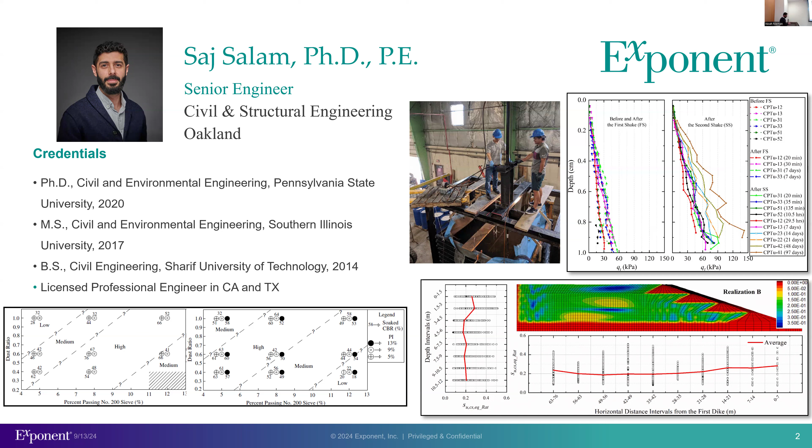The other part of my study was running numerical simulations to study the seismic stability of tailings dams. I modeled the tailings dam with random fields, assigning random properties to the tailings instead of uniform properties, which is far from reality. I'll stop here and move to what we do at Exponent.

We've been involved with a lot of high-profile failures in the States and internationally. Many of you may recognize this picture — this is the bridge collapse in Baltimore that happened a year ago, and we are already working on behalf of one of the involved parties in this project. The top right one is the bridge collapse in Pittsburgh that happened about 3 or 4 years ago. We worked on that case and helped our clients understand the causes and the failure mechanism.

This bottom left one was a project I worked on last year in the Los Angeles area — a huge landslide that resulted in full destruction of a downstream construction area and significantly impacted two upstream buildings. The bottom right one is the Oroville Dam incident, which I'll briefly talk about as part of my presentation today.

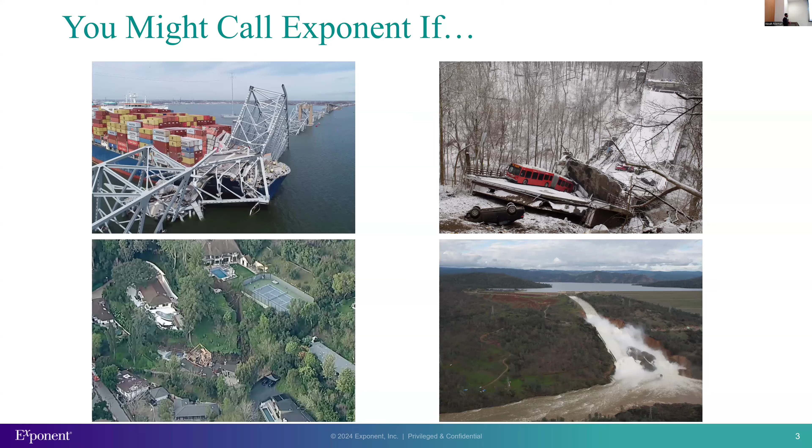Here is the agenda. We're going to start with the investigation process, which is the key process in any forensic engineering project. Then I'm going to present three of the projects we've done at Exponent, showing how we approach research-like questions in forensic engineering. At the end, if we have time, I'll talk more about Exponent and working at Exponent, and we'll wrap up with a Q&A session.

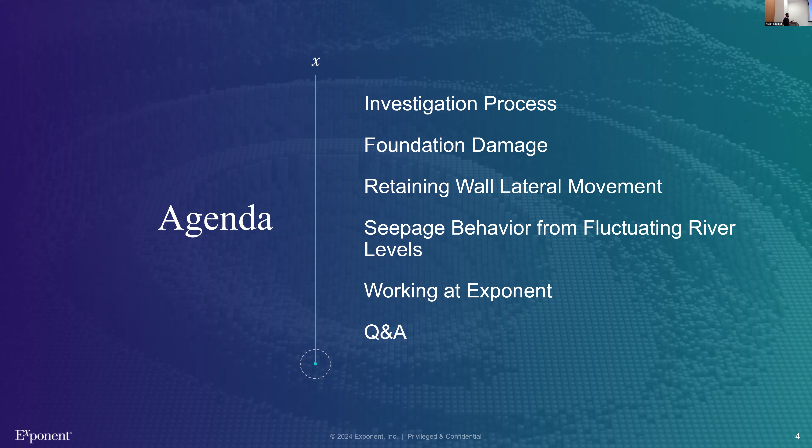So let's start with the investigation process. The purpose of investigation actually depends on who your client is — if it's a defendant or plaintiff, or it could be a government agency, judge, or public prosecutor. Depending on your client, your scope could be any of these bullet points or a combination of them: determining the causes or mechanism of the failure, or the responsibility.

The main one is determining the causes, because once you know the answer to that question, it should be pretty straightforward to assign responsibility to all the involved parties in the failure. So to determine the causes, you need to answer some essential questions about the trigger or origin of the failure, and also the underlying mechanism. Each failure has a primary cause besides some contributing factors, and you need to identify all of those.

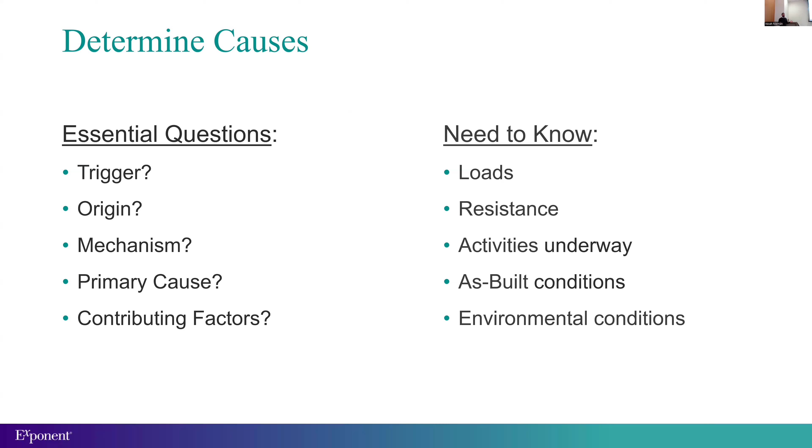To answer these questions, there are some input parameters you need to know for your investigation and analysis, like the loads and resistance. If the failure happened during construction, it should be the activities during construction. If it happened after construction, you need to know the as-built conditions or environmental conditions, like maybe an earthquake happened, or a significant storm right before the failure.

At the end, you need to always establish the causal relationship. You need to show if there was a design error, construction defects, or maybe lack of maintenance. But at the end, the goal is to show a causal relationship between the action or lack of action and the failure.

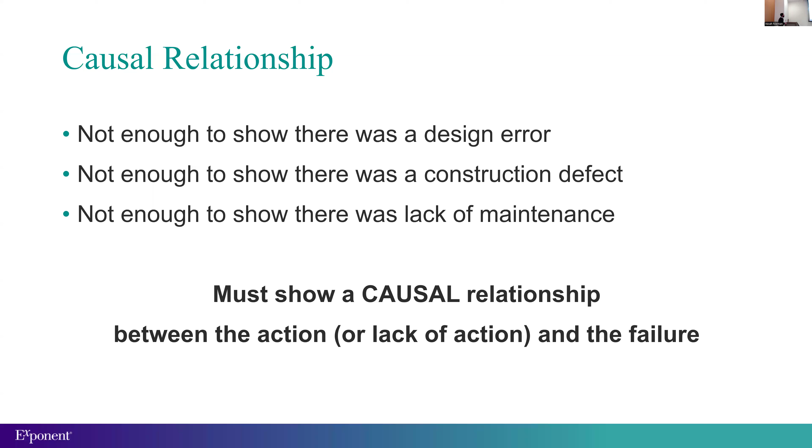So let's define the trigger. The trigger is the event that caused the collapse to occur at that particular moment. It could be a variety of things, like added load. It could be environmental, like a significant storm, or construction, storage, or usage. Or it could be an earthquake, removal of a member during renovation, or undermining due to adjacent excavation or deterioration of members.

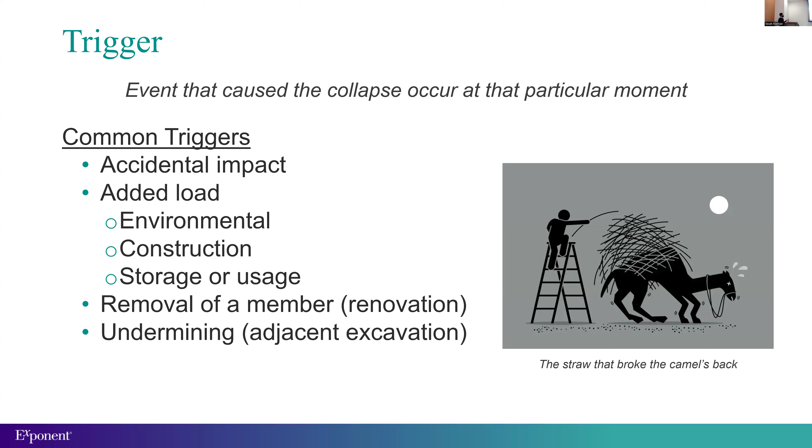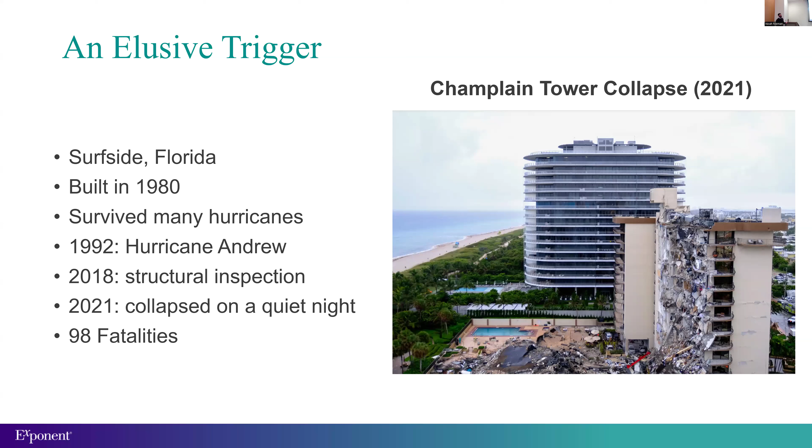But it's not really easy, and sometimes it could be really elusive to find that trigger. For example, the Champlain Tower that Exponent also investigated - this tower was built in 1980 and had gone through several hurricanes, like the 1992 Hurricane Andrew. Even in 2018, there was a structural inspection and no note of imminent failure for this tower. But on a quiet night in 2021, it collapsed, resulting in 98 fatalities.

So the next question was the primary cause. This is the important one, because without this event, the failure would not have happened. Sometimes it's different than the trigger, and that makes it really hard to identify the trigger besides the primary cause.

As I said, besides the primary cause, there could be some other contributing factors. To identify them and see which ones actually contributed to the failure, you need to do some types of sensitivity analysis and isolation of the factors for your analysis.

For example, you have 3 factors that could have contributed to the failure. You're going to consider all of them first individually. You may see that with factor A, you're going to be fine, in a safe zone. With factor B, you're going to be in the yielding zone. And factor C, you're going to be really close to failure. But at the same time, you can see that when you consider factor A and B happening at the same time, you're going to be in failure.

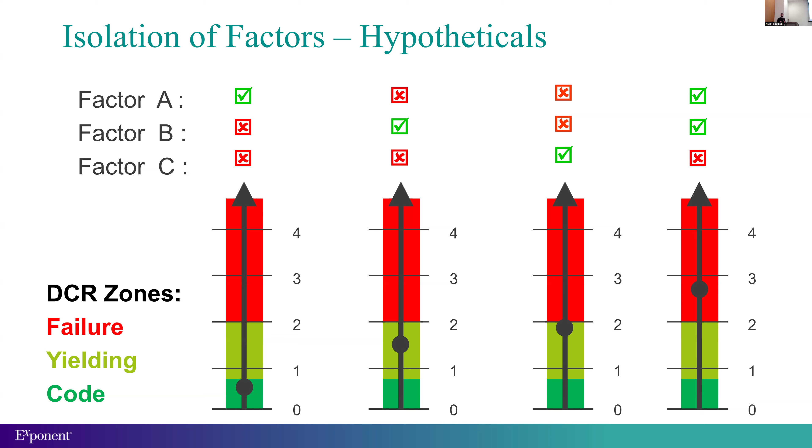With this introduction, every failure analysis could consist of a combination of these steps, or all of these steps. The first one is the field observation, which is really important. The next one is the document review - that could be reviewing the design documents, construction documents, daily reports, operation records, or maybe some investigation from the past that you need to review too.

After collecting all this data, if you still need more information, you may need to do some additional testing, like lab testing or field testing. The last one may not sound that fancy, like hand calculations, but it's always a really good first step to understand some probable causes of the failure.

At the end, if you are dealing with a complicated case and need some flexibility with doing sensitivity analysis or exploring some input parameters, we need to do some advanced analysis, like using finite element methods and software that are able to do such analysis.

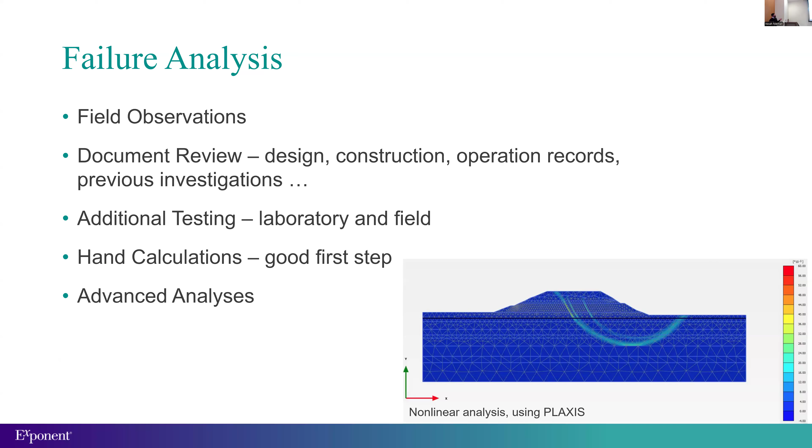So now knowing all these steps that may be needed in failure investigations, let's go through 3 projects that we have done. For each of these, they vary in size and amount of effort that was needed to answer the question. The first one is a small project - it was about a foundation damage.

It was basically an insurance claim, and we were working on behalf of the insurance because the insured was claiming that they had a recent crack in their foundation because of some leakage from the piping and probably some soil movement that could be expansion or collapse of the soil. But the main claim was that this crack had been formed recently. The house was a single family wood framed house built in 1981 in Sacramento.

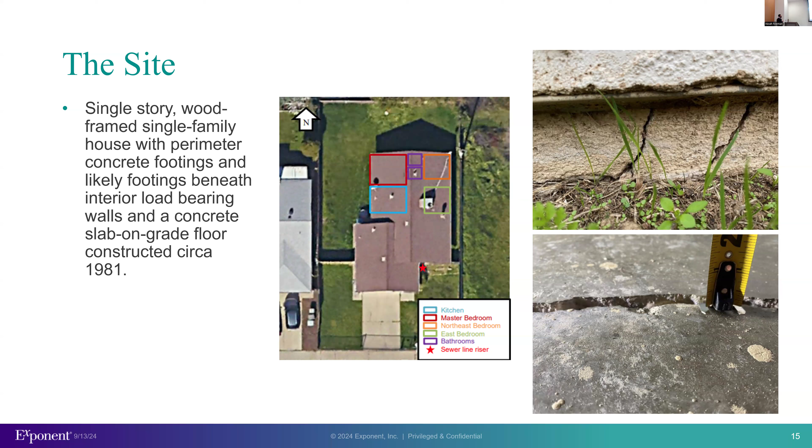So I did the site visit. First, the foundation system of this single family house was a perimeter footing with slab on grade in between. First, I noticed some cracking on the perimeter footing, and also inside the house, in this east bedroom, there was an east-west crack in the slab on grade.

Then I moved inside the house and performed a relative elevations survey to basically see the pattern of the movement of the slab and the foundation. Here you can also see where I saw those cracks on the perimeter footing and the crack inside the east bedroom. There was also a big crack on the ceiling.

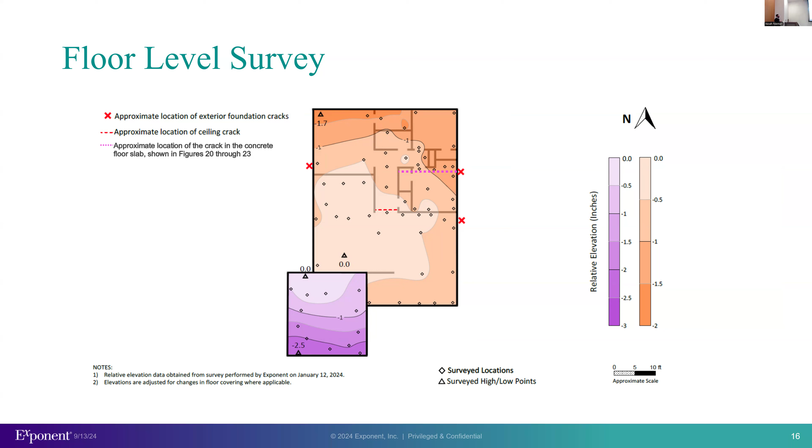The first thing that you notice, there is this floor movement, the settlement of the slab on grade is not entirely consistent with the location of these cracks. So I made some more observations. The first one was behind this wall is the east bedroom and that big crack that was going through the slab on grade.

The first thing you see, there is no distresses on the wall and also no crack on the tile. If this crack had been formed recently and it was that strong to make a crack in the slab on grade, it would definitely damage this wall or this tile.

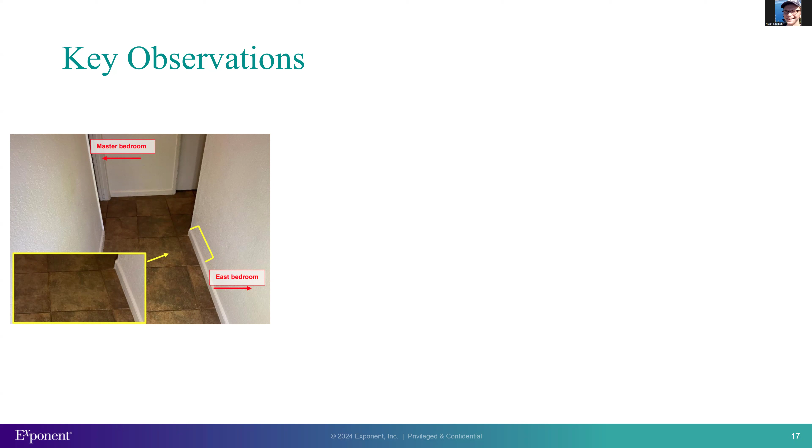The next observation that I made are these wood tacks. They usually install these wood tacks to place the carpet on top of the slab on grade. I noticed no damage. They were not snapped out or anything like that. So if this damage was strong enough to crack the slab on grade, it could definitely damage this wood piece, but it had not done that.

And the third one, which in my opinion was the most important one, was a close look at the crack. You can see that the edge of this crack is kind of weathered. It's not showing that it has been formed recently. And more important than that, this crack is just nicely going around the particles.

All of you have taken that laboratory course where you do testing with different types of material, and you do the compressive strength test with the concrete cylinders, and you see when you crack the cylinder, that crack goes through the cement part and particle part. It cracks everything. But this one is nicely going around the particles.

So all of these observations led us to conclude that probably this was a placement error or a mixture error of the concrete, and it just formed shortly after the placement back in 1981. So we were able to answer the question to our client, and it was just field observations and some simple measurements.

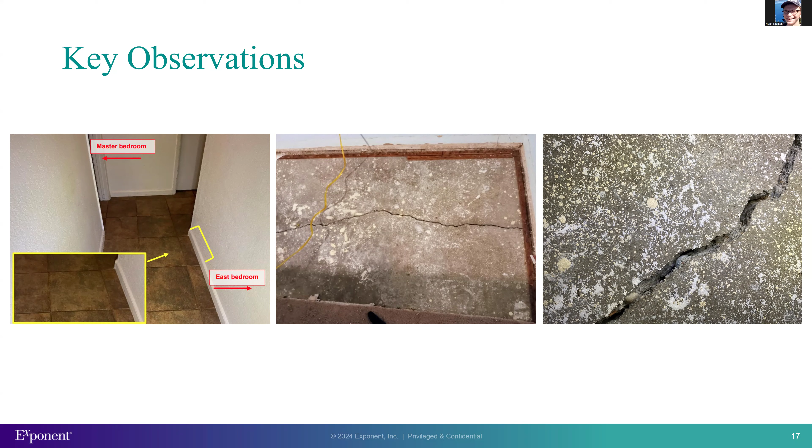Now moving to the next one, it was about the lateral movement of the retaining wall during pile driving. Our client here, this was a construction claim, and we were working on behalf of the contractor. Basically, they were developing this area with these 2 buildings. Along the south edge of this construction area, there was supposed to be a retaining wall.

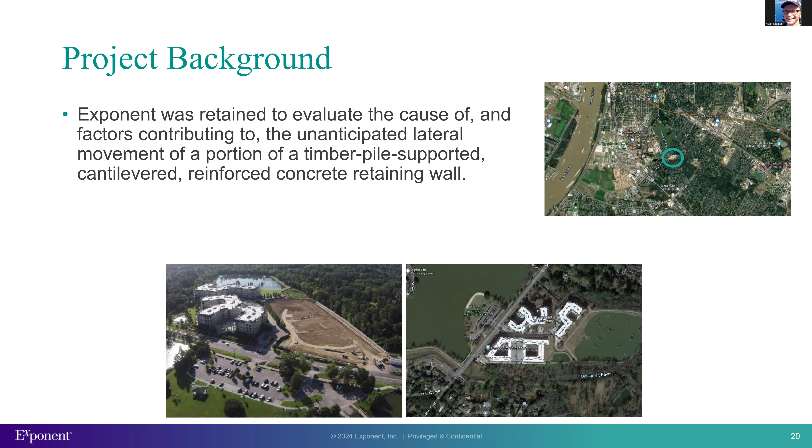During the construction, they noticed some unexpected horizontal movement of this retaining wall. We were retained to evaluate the causes and some other contributing factors to the unexpected lateral movement of the retaining wall, which was a reinforced concrete wall with a footing that was sitting on top of some timber piles.

So here, let's talk first about these buildings. We had 2 buildings, building A, building B, and some parking garage area, and this is the driveway on the south edge of this area, and this is our retaining wall. The foundation system for building A and building B consisted of about 1,500 timber piles that were about 65 feet long. The foundation for the parking garage was precast concrete piles that were 65 to 90 feet long.

And then on top of the footing, we had 2 cast-in-place piles to act as a foundation for the concrete driveway. The whole purpose of this retaining wall was to hold this backfill, which was needed because they needed to raise the grade elevation 10 to 11 feet to make this driveway.

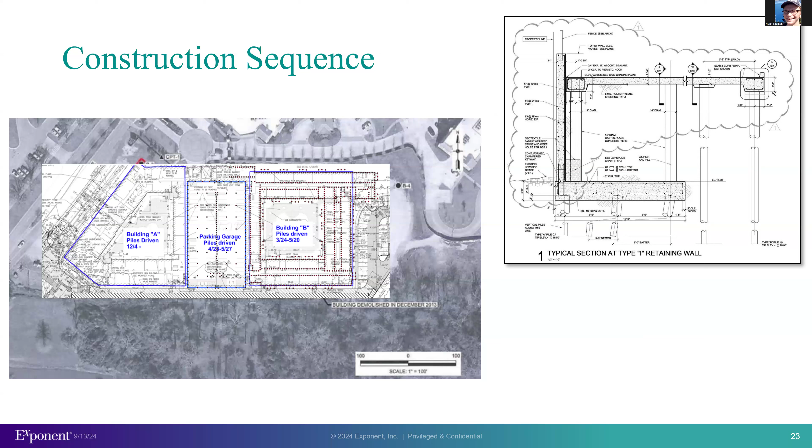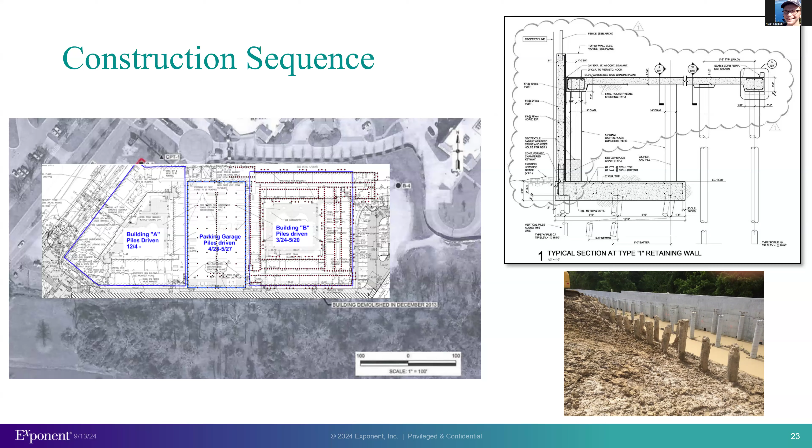Let's go through the construction sequence. They made the cuts here to prepare for placement of the timber piles, and then they placed the timber piles. As you can see, the first row is vertical and these 2 are battered.

One very important observation made during construction was that when they placed these, especially the vertical timber piles, they would drop 15 to 25 feet under their own weight, showing that they were dealing with very soft clay there.

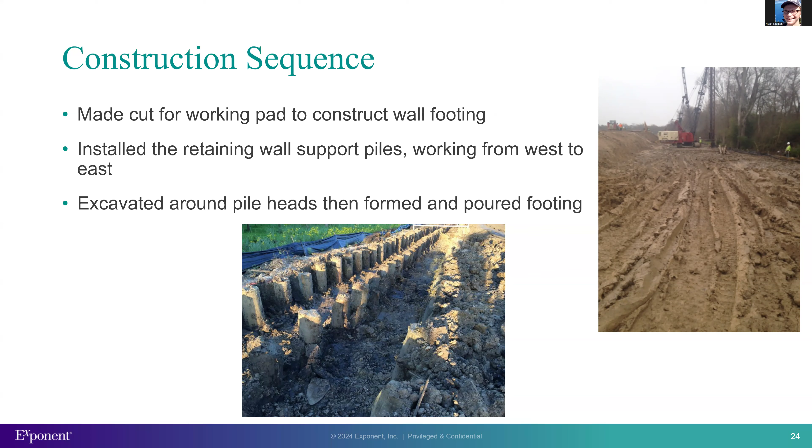Moving forward, they placed that concrete footing, and then cast-in-place concrete piles on top of the footing, and then made a one-to-one slope to make a construction pad at the back of the heel of the footing, and then they started backfilling here.

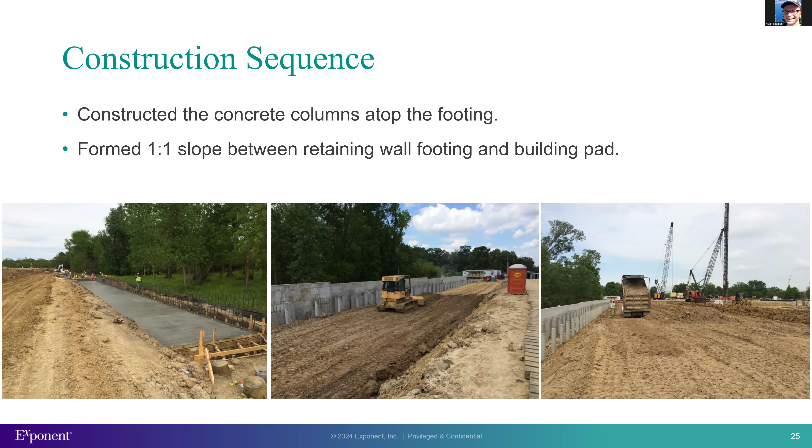After that point, they started installing the timber piles below building B and the parking garage that I showed a few slides before. Around this time, they noticed some lateral movement of the retaining wall.

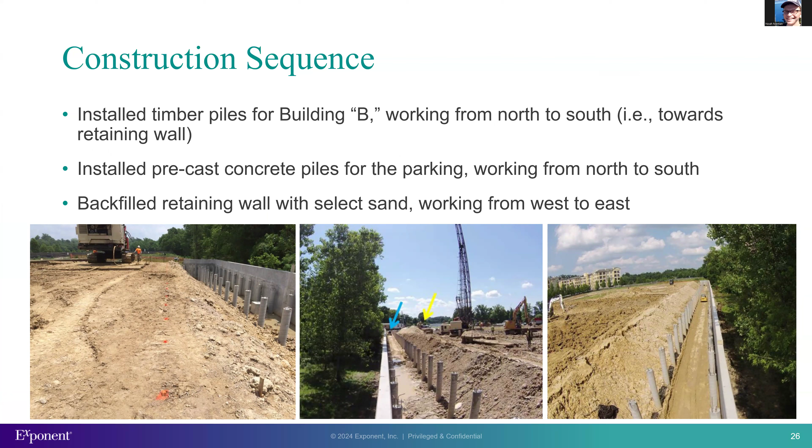So we were called, we went to the site, and we noticed the widening of expansion joints, some diagonal cracks, some seepage at the bottom of the wall, and also some breaking noises while we were doing the site visit.

So we installed some instruments to monitor any movement of the wall. We did some additional testing to better interpret what is going on in the subsurface, and to make sure the assumptions for the soil strength were accurate or not.

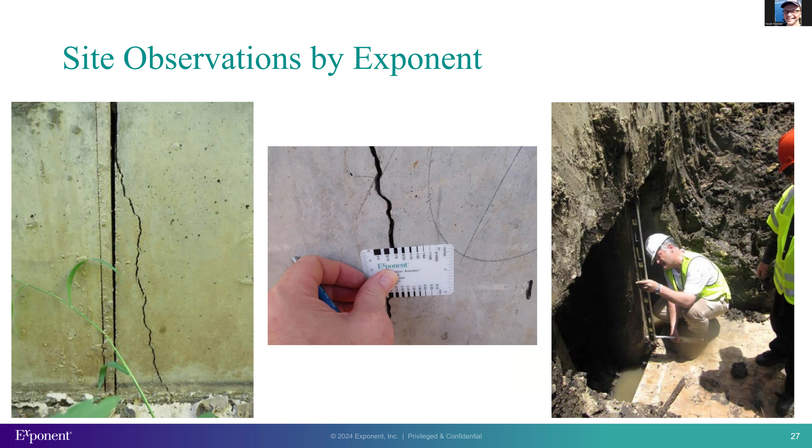You can see the lateral movement at the bottom of the wall was as large as 11 inches, and the outward rotation was about 1 degree.

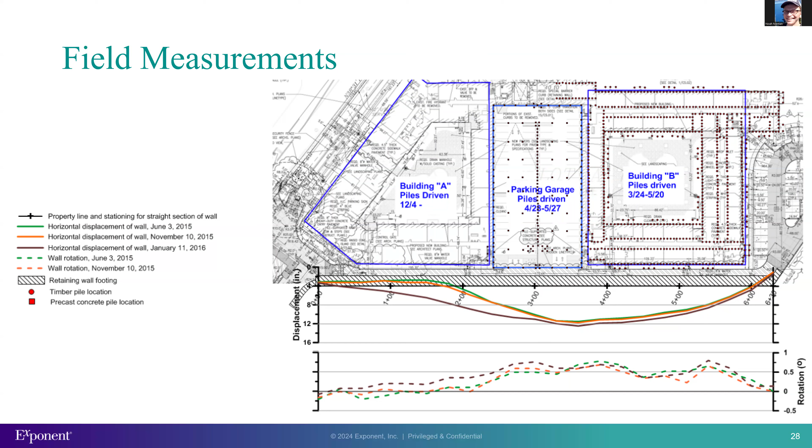So we started our analysis. We compiled all the data, all our observations, and then we established the subsurface layers and their strengths.

Basically, the first thing we could think of was the global instability of the wall. So we used SLOPE/W software, which is a limit equilibrium analysis you may have heard of if you've taken soil mechanics or geotechnical engineering. In this analysis, we considered the effect of this one-to-one slope and the reinforcing effect of the piles.

When we did the slope stability analysis, the factor of safety at the cross section with the largest lateral movement came out to be 1.5, showing that global instability is not the issue here.

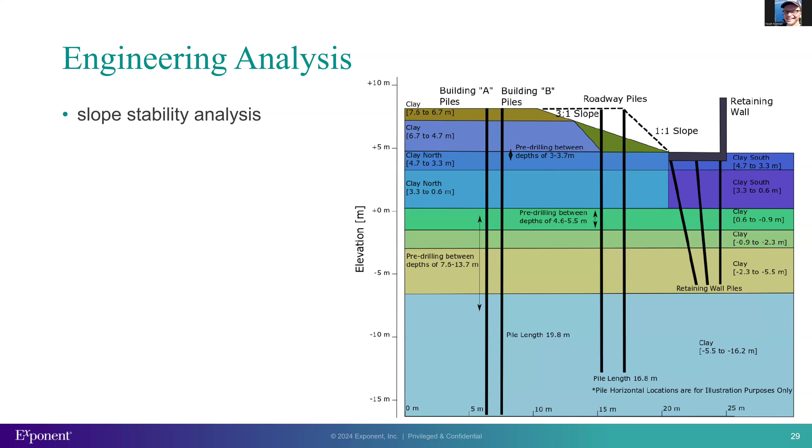So the next step was doing deformation analysis, finite element analysis with a software called Plaxis. The benefit of using such deformation analysis was to consider the effect of the construction sequence, the excavation, the backfilling, the reinforcing effect of the piles, the soil-structure interaction, and also the weight from the crane operating at the top of the slope.

We first calibrated our model at a cross section that showed the least amount of lateral displacement. After calibrating our model, we moved to the cross section with the largest lateral movement, but the amount of movement we could calculate from this analysis was only 3.6 inches, while the observation was about 11 inches. So we still had not found the primary cause of this movement.

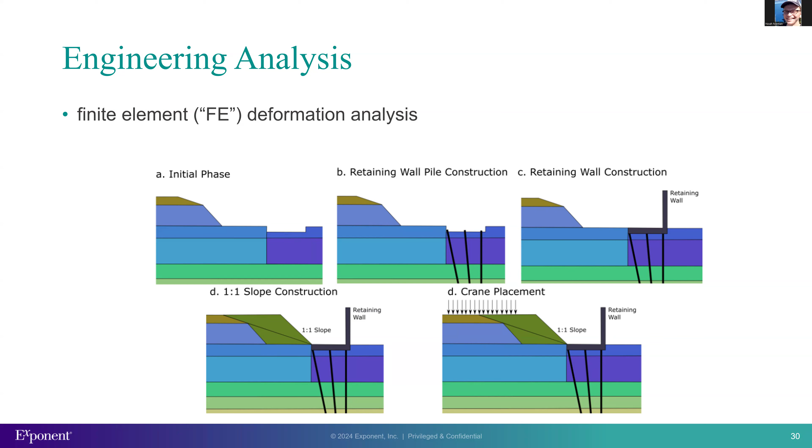So the next step was considering the cavity expansion. We did the cavity expansion analysis that basically goes over the undrained soil deformation around an area where you are doing the pile driving. This is a very well-known phenomenon, but it's been mostly studied in stiff clays.

This project is from the Boston area. They did a lot of studies and measurements during this project, and they noticed that the influence zone in stiff clays from pile driving could be 2 times the pile diameter. But here we had soft clays, so it could be less.

So here are the formulas. I'm not going to go through the details, but basically you can calculate the lateral displacement due to the pile driving. We need to calculate the critical radius beyond which there won't be any significant influence from the pile driving. That critical radius is dependent on the shear modulus and undrained shear strength of your material, and you can see the stiffer it is, the higher the G, the higher the critical radius.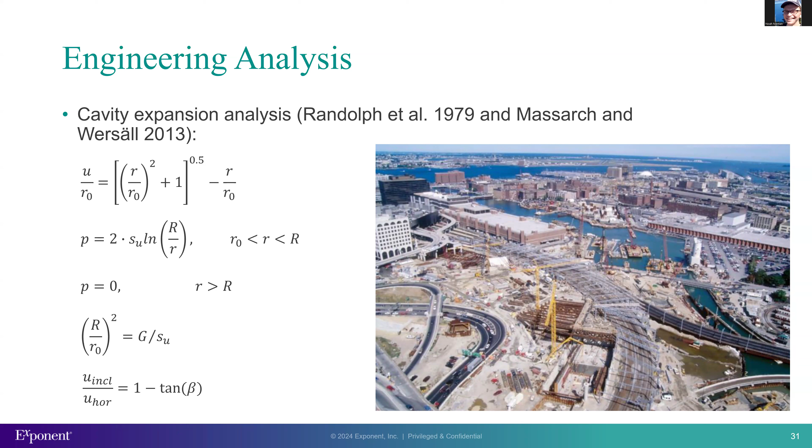After running this analysis and combining it with the finite element deformation analysis that we did, we noticed that at the section with the largest lateral displacement, combining them together, we could estimate up to around 10 inches of lateral displacement, which was pretty close to the observation in the field.

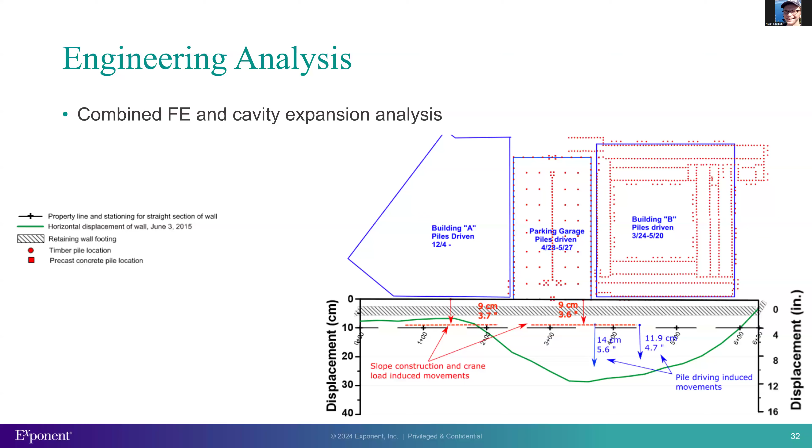After doing all this analysis, we could make these conclusions. First, this was a foreseeable event, so the designer was the responsible person to foresee this problem and figure out a way to avoid such unexpected movements.

The primary cause was the pile driving and cavity expansion. But besides that, building that one-to-one slope just behind the heel of the retaining wall, and also the operation of the crane on that slope, were the other contributing factors.

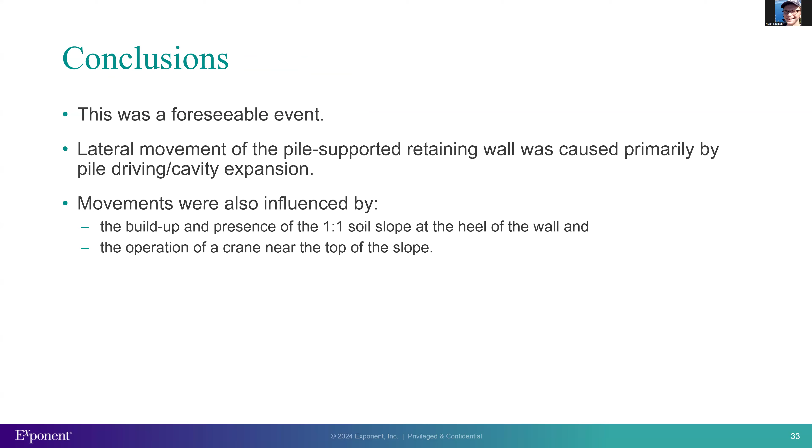So let's move to the next project. I'm skipping a lot of details, so I'm going to leave enough time at the end for questions.

So the last one is the seepage behavior from fluctuating river levels. In this project, we were working on behalf of the Department of Water Resources. I need to give some background before going through the details of this project.

It was related, or a consequence of, the Oroville Dam incident in 2017. This dam is in North California, and it's the tallest dam in the States. It is 770 feet tall, and it has the main dam and the main spillway that you're looking at here, and an emergency spillway next to this main spillway.

From the bottom to the top, it's 1 kilometer long. When it's discharging water, it can fill an Olympic-sized pool in 2 seconds. That's equal to 300,000 cubic feet of water.

In 2017, around February, California was experiencing one of the wettest winters, and they needed to discharge some water to bring the reservoir level below an emergency level. Shortly after they started discharging water, they noticed some weird pattern on the spillway.

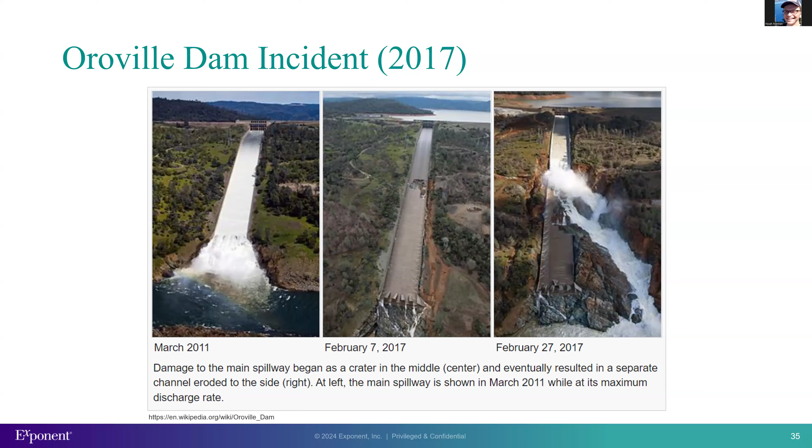At the same time, the weather was not their friend. The rain kept coming, so they had to discharge water from the main spillway. They started doing that, and it took about 2 weeks. Around that time, they had issued an evacuation order for 200,000 people downstream. At the end, a lot of water was discharged to the Feather River downstream.

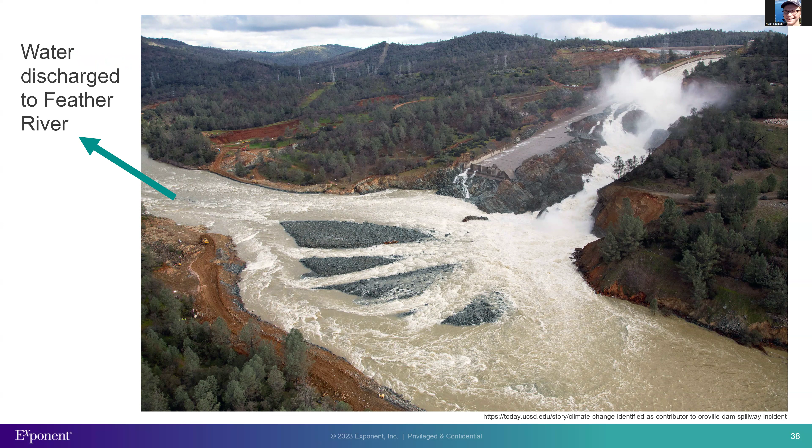The farmers downstream along the Feather River were claiming that this pattern of water release and the amount of water that was released caused inundation of their farms and oversaturation that damaged their trees and also caused loss of product.

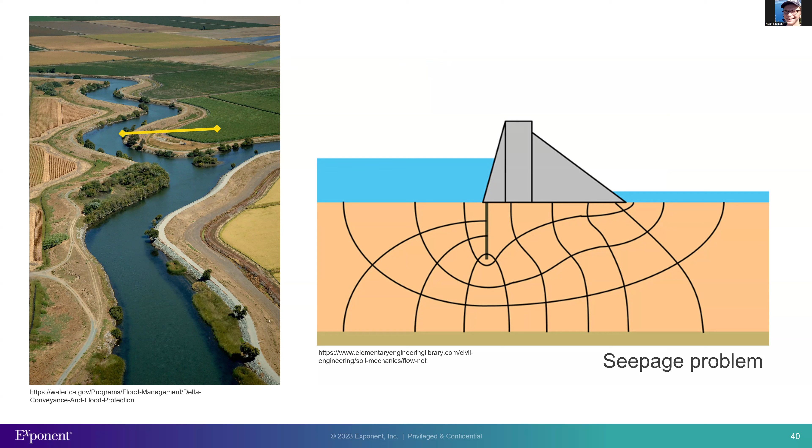So we were studying that, and here again, this study was a seepage analysis study. You can see that along the river you will have the levee, and as the river level goes up, you're going to have some effects in the field on the other side of the levee. There were some photos from May; the incident happened in February.

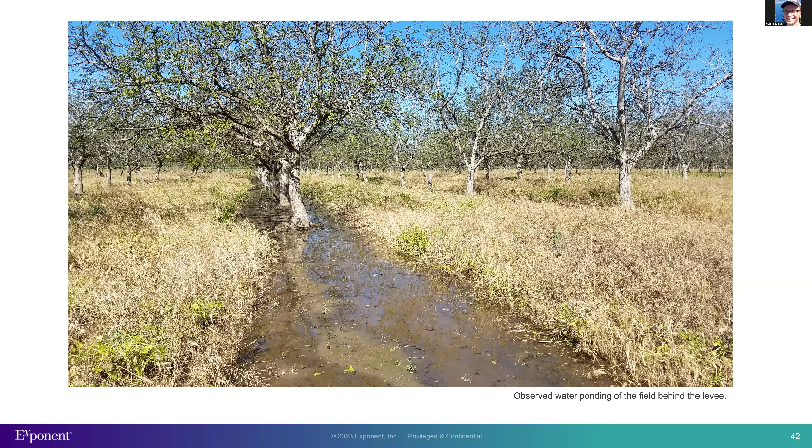And this photo is around May, and they were showing some ponding water in their farms and showing that their trees were damaged. So to give you some background, it's not directly related to geotechnical engineering, but there are some similar concepts like in unsaturated soil mechanics.

There's something called field capacity. Beyond the field capacity, your soil is going to get really close to saturation or oversaturation. We all know if you don't water your plants enough, they die, but if you water them too much, they also die. So the way plant pathologists look at this problem is that we don't want to go over field capacity, and this field capacity is different for different types of soils.

For different types of soil, the field capacity varies. For example, for clay, for silty clay type of soils, that field capacity, which is equivalent to the volumetric water content of the soil, is around 30%. So just keep that in mind. Later, I will get to this.

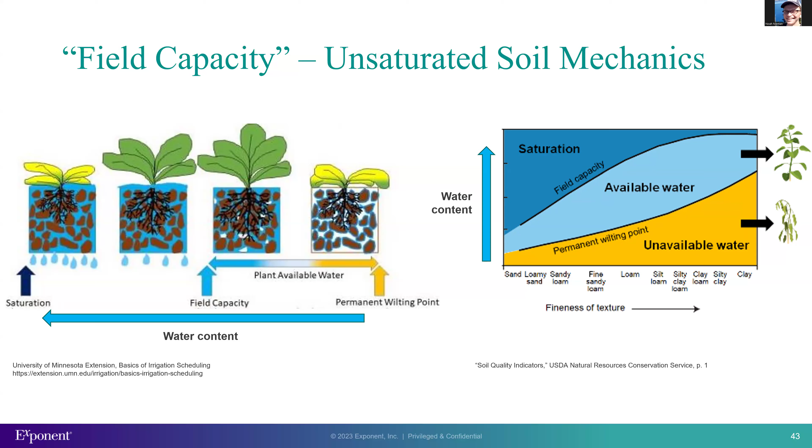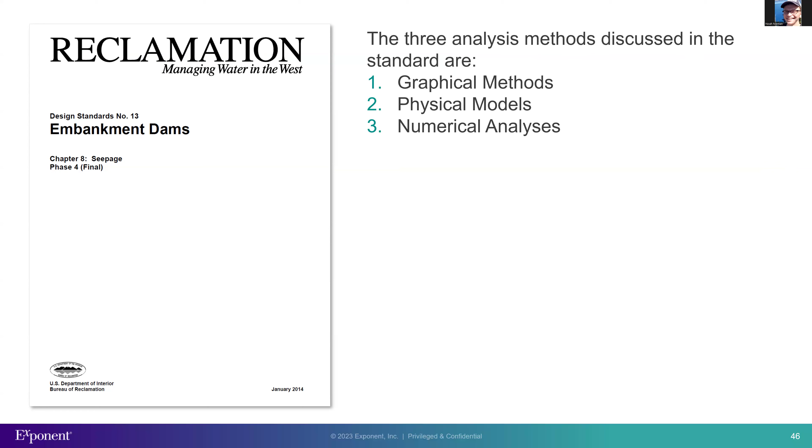So we needed to approach this problem and see if this incident indeed caused the problem that they were claiming or not. So we used the US Bureau of Reclamation design standard number 13 for embankment dams. In this manual, they offer 3 methods to go over the seepage problem: graphical methods, just drawing those flow nets that you all have done in your undergrad courses; physical models, just doing field testing; and the last one, numerical analysis.

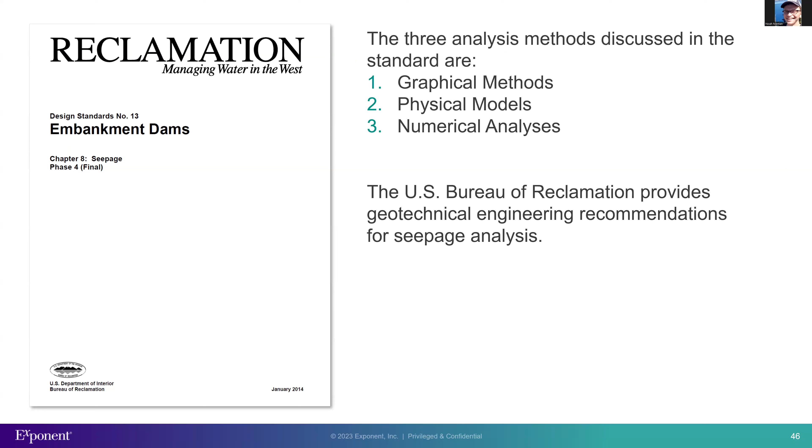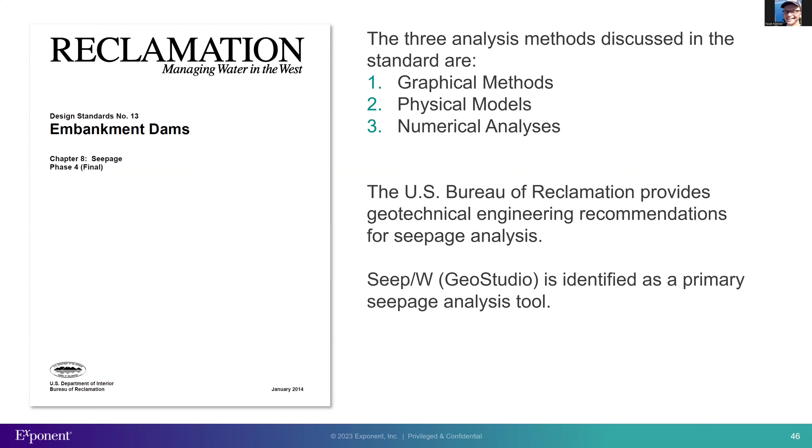And that is the one that we adopted, because it gives us the flexibility to do some sensitivity analysis, to vary our input parameters and see how sensitive the outcome is to the input parameters. So we used SEEP/W from GeoStudio software, a module that uses finite element method to do the seepage analysis. We needed to first collect all the input parameters for our study.

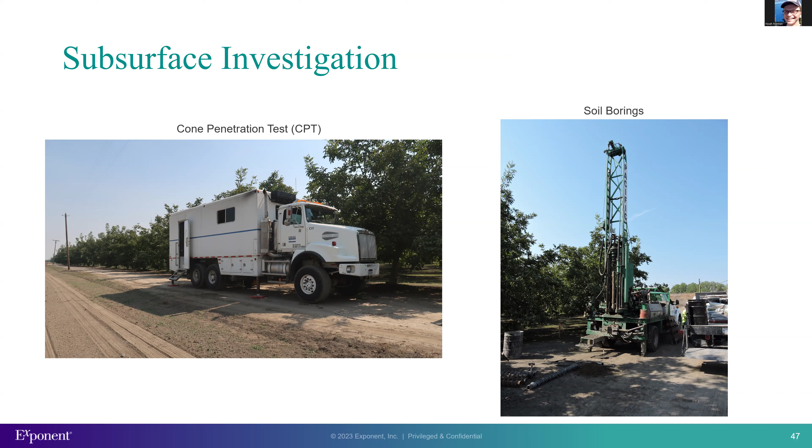So we did a lot of CPT testing and some boring logs next to our CPT testing to first verify what we see from the CPT, and also take some samples to run laboratory tests to know the unit weight, the void ratio, the moisture content, and above all, the hydraulic conductivity of the different types of soil. And we did a lot of them.

We did some testing just behind the levee, some far from the levee, because some of these farms were not adjacent to the levee. So we needed to do a lot of testing to establish that cross section just across the river.

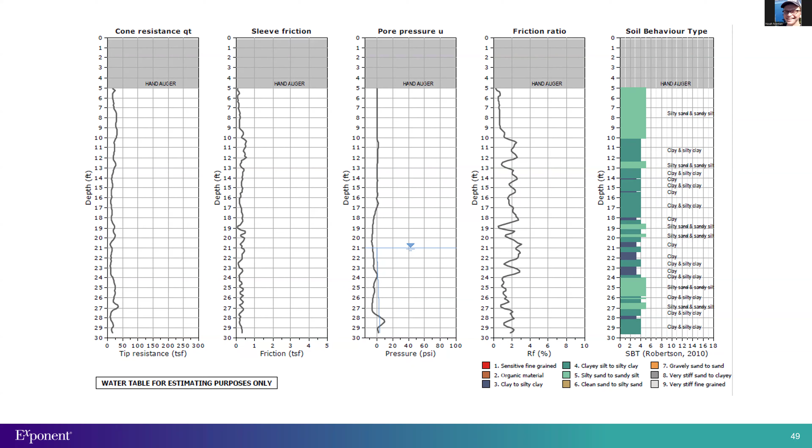So here's just one example. You can see different types of soils, from silty sand to clay silt to clay and silty clay. They're all smashed together here. And from the geology point of view, it was all alluvium and marine deposits. But again, from the hydraulic conductivity point of view, there were a lot of differences.

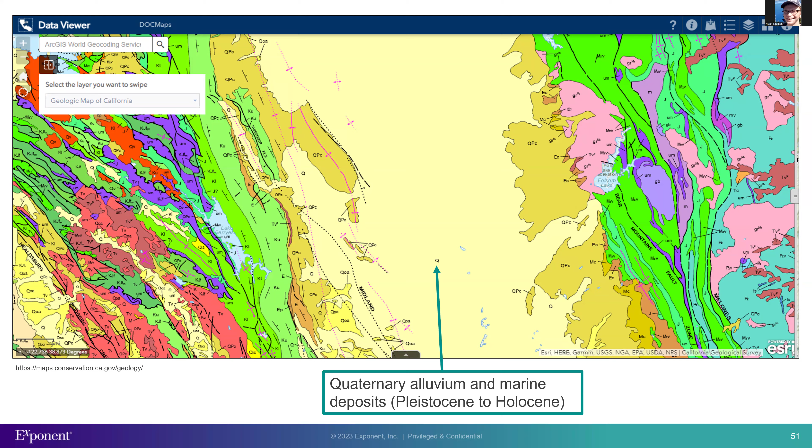When we did the testing and collected all the data, we could establish this 3D model of geology. We needed some 2D models for doing the seepage analysis, but this level of complexity is not practical. Nobody models the seepage analysis like this. So we needed to do some simplification. We also had lower and upper bounds for our permeability, so we needed to make some decisions.

So after going over all data, this is a simplified geological cross-section that shows different types of material and also their permeability. Here, for example, this is based on 3 boring logs next to CPT testing. And of course, we had done some desktop studies, used some previous investigations and previous reports.

The other input that we need for the seepage analysis is basically the input from one side of the levee, the varying river level that was an outcome of the release of water from the dam. So we had the hydrograph observed in 2017, but we needed something to compare that hydrograph to, asking what if this incident had not happened. So DWR had another consulting company give them a hydrograph representing a without-incident scenario, but from the worst case scenario possible in this location.

So we had 2 hydrographs, so we could do the seepage analysis for both scenarios and see if there is any significant difference between them. Let's look at GFX3 for the sake of the discussion. This is the model in GeoStudio, as I say, using finite element method. You have the river level here, and in the steady state, you can assume the groundwater table is going to be like this.

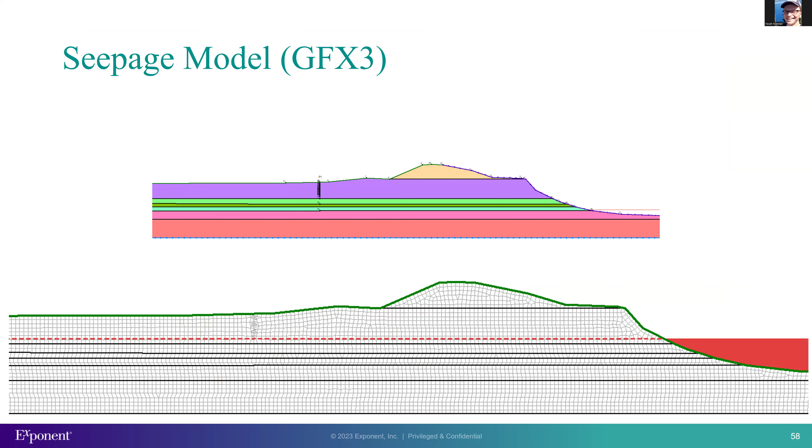Here is the analysis that we did. The blue one is the hydrograph with the incident, which was observed and recorded in the field, and the red one is without the incident. You are looking at the changes in the groundwater table below and beyond the levee over time.

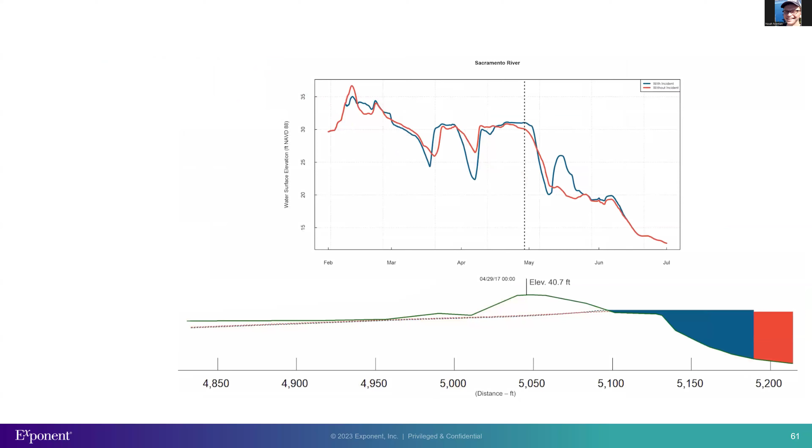You see that they are pretty close, and as we approach May, this groundwater table becomes really close to the surface and becomes like ponding water. That's important because we need to make sure our model is close to the truth. Around this time, this photo I showed earlier was taken, and you can see the groundwater table from our model was really close to the surface.

You may ask that probably we are still far from reality, but the note here is that the model was not considering precipitation, irrigation, evaporation, or these kinds of things. If you include those factors in the model, probably you'll get something like this. So based on this and a lot of other sensitivity analysis that we did, we believe our model was accurate and we could make some conclusions.

We made some graphs and conclusions at different points and distances from the river. Here I'm going to show P1, which is closest right behind the levee, and point 4, which is farther from the levee, to see how different the groundwater table would be going through the differences in the hydrograph over time.

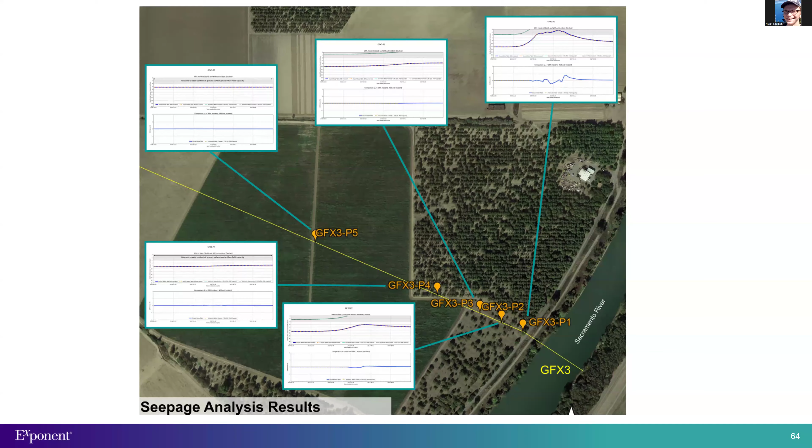Starting with P1, right behind the levee, you can see there are some differences in the groundwater table. The solid line is with the incident, the dashed one is without. Around April there are some differences, but that difference is still less than 1 foot. Here is showing the field capacity, the volumetric water content - if you go beyond that you're basically overwatering your plant. You can see that as the groundwater table goes up, even at the surface, you're exceeding that field capacity.

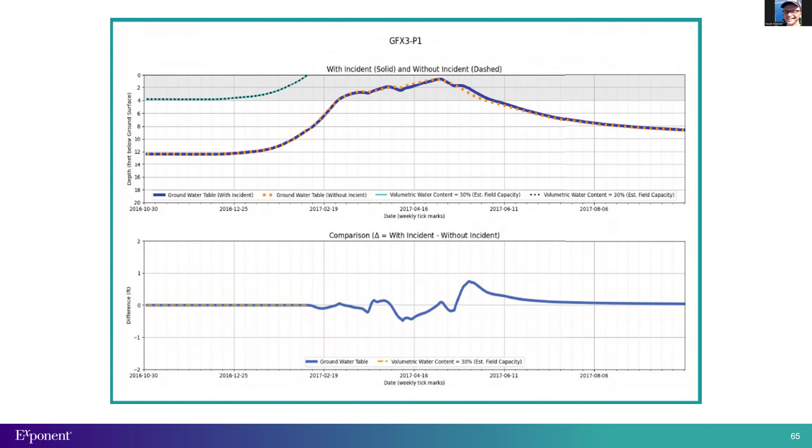Now let's look at a point farther away from the levee. You can see almost no difference in the groundwater table, and the field capacity had not been exceeded over time, even at the surface.

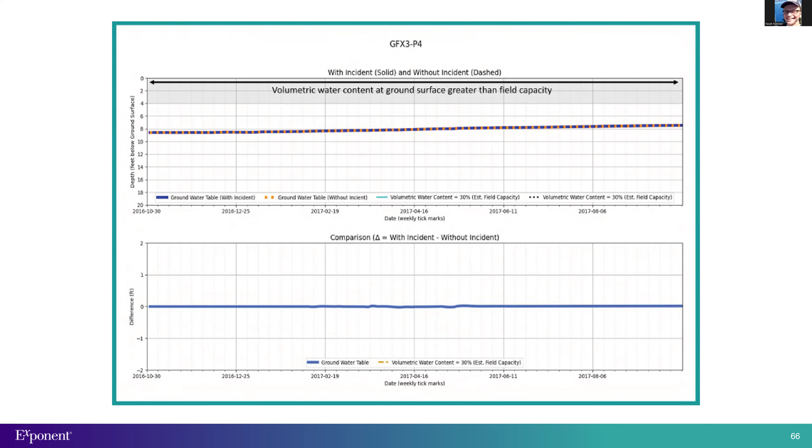Based on this, we could make conclusions. First, the differences in the groundwater table due to fluctuating river levels was most pronounced close to the levee, and as we got farther from the levee, that difference diminished. The last conclusion was that the groundwater table and field capacity was very similar for the with-incident and without-incident cases - these scenarios produce essentially identical responses at the subject location.

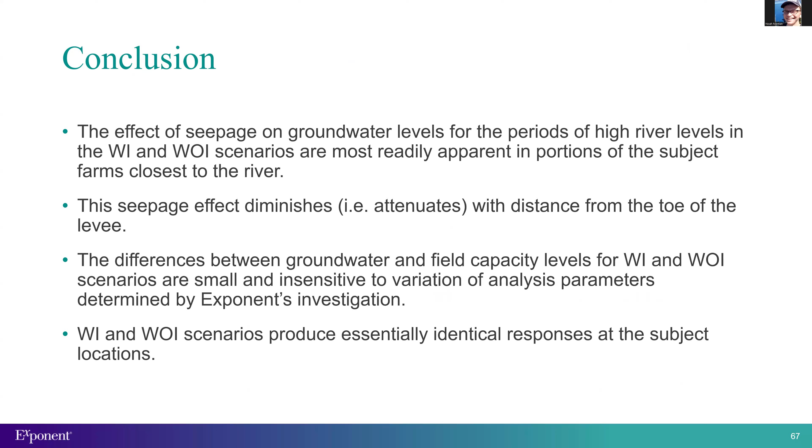So in a worst case scenario expected in significant rain, you would have the same problem in the absence of problems with Oroville Dam. So the Oroville Dam incident and that irregular release of water was not contributing to the issue in the farms downstream. That was the end of the three projects I wanted to briefly talk about.

About the first question, sometimes it may not be practical - you may need to do a lot of testing to know everything. But in that specific case, for the lateral movement, you need to know about cavity expansion. We went over a lot of details, but even they had made some mistakes in interpretation of the soil strengths. We noticed that the soil strengths they had assumed was 50% more than what it should be. And I mentioned that the timber piles were dropping 15 to 25 feet when they were installing. So at that point, they could have said, let's pause and reevaluate our design, but they didn't do that. But I agree, sometimes it's not practical.

We get a lot of design-build projects, specifically on the East Coast. They have like 10 or 20 borings, and based on those, the contractors go out and bid on the project, saying they'll complete it for 20 million. But once they start, they thought there was 10 feet of clay they could handle with consolidation and surcharge in 2 months. But as they penetrate the soil more and do more testing, they notice that in some places the clay is 30 feet, they fall behind schedule, and they claim differing site condition. That's not fair, because they needed to do more desk study or more testing. In this specific case, I believe it was foreseeable - they could have at least considered the presence of soft clay and the cavity expansion. It was pretty well known in clays.